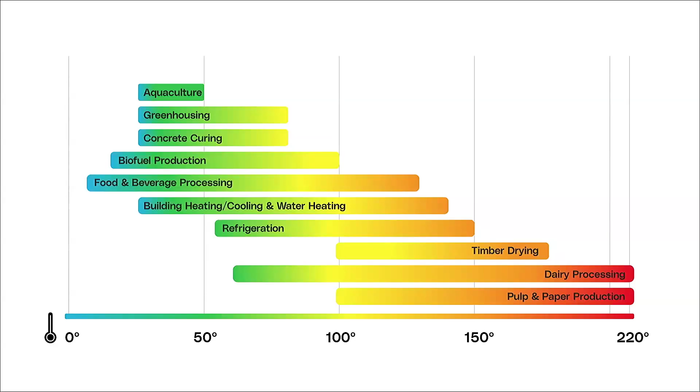In our homes, Hannah pointed out earlier, 32% of our electricity is used directly for heating. Approximately 30% for our hot water, and 10% of our electricity bill goes towards cooling, and that number is predicted to increase. That's a lot of electricity that is converted into heat. Now to go with my first point, to transition to a low carbon energy future, we cannot overlook the importance of decarbonising heat.

So what is geothermal heat, or geoheat? It's geothermal heat. And I've just got a little video so you don't have to listen to me that explains it. Geothermal heat is a renewable, low-emission energy source.

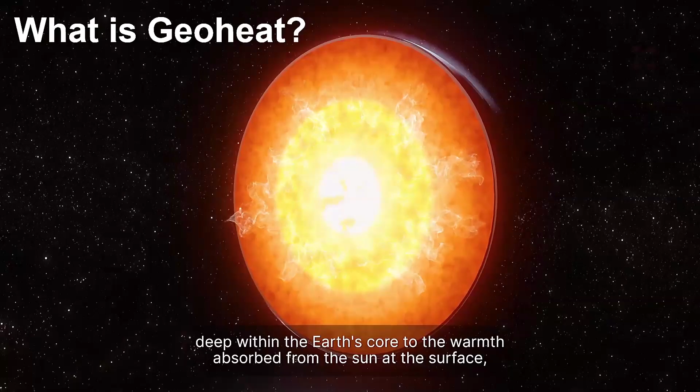Humans have used geothermal heat for thousands of years, and when this energy is used directly, we call it geoheat. It refers to all forms of heat present within the Earth, from the intense heat deep within the Earth's core to the warmth absorbed from the sun at the surface, as well as the high temperatures produced by volcanic activity. Aotearoa New Zealand's unique geology offers abundant and accessible geoheat, closer to the surface than in many parts of the world. From the Southern Alps to Northland, our land produces geoheat at varying temperatures.

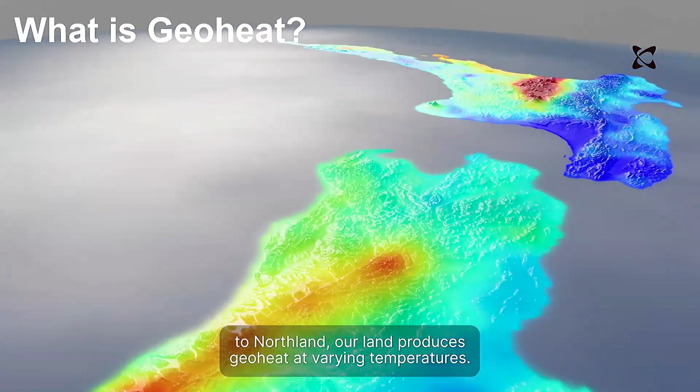What is on that map for you? This map here is the results of some work that my colleague has been doing over the last few years, and that's looking at how heat is transferred throughout our country. So it's looking at our thermal rock properties, our tectonic setting, our erosion rates, the physical properties of our rocks, and what that means for how heat is stored and transferred in our subsurface.

Caveat, it's got a color scale on it, so it does look like the Alpine Fault holds as much heat energy as Taupo Volcanic Zone. That is just a color scale thing. But that having said, we do have a lot of hot springs along the fault. The other thing to point out here, blue doesn't necessarily mean there's no heat, it just means there's less of it.

Geothermal heat is a... Don't need to listen to that again. I'll put that in there in case it didn't stop. So

Heat stored in the ground is generally stable throughout the year. As the video said, we've been using heat in New Zealand for a long time, generally around the high temperature stuff. But before we even settled here, in Europe, cavemen lived underground. They knew the ground was warm in the winter and cold in the summer. So this next slide sort of gives you an indication of how we access the heat.

In high temperature areas where there's a lot of energy in the subsurface, we utilize it for geothermal electricity generation. You wouldn't be able to do that with the heat provided down here. However, there is still heat in your ground that could be extracted for residential heating, office block space heating, greenhousing, and there's more and more technologies being developed that can convert low-grade heat into electricity.

So this figure here just sort of shows different ways, what we call direct heat, that's where you directly extract the heat that's beneath the ground, and indirect heat, where you utilize something like a ground source heat pump or a bit of technology that will convert your heat into electricity. There's a big conversion loss.

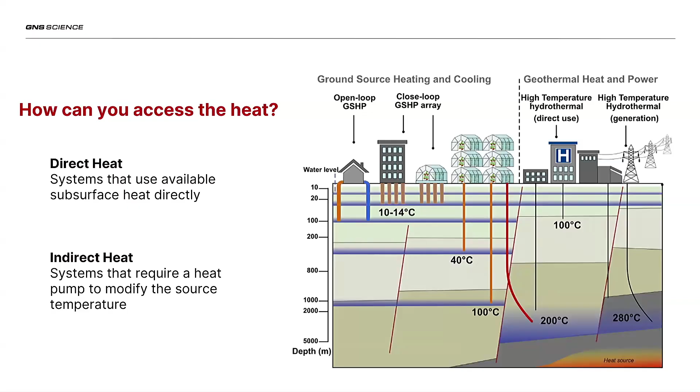Even when you're in the high temperature systems, when you're producing electricity from geothermal steam, you're losing about 85% of your heat, and your energy is just being dissipated or re-injected into the ground. So you've only got a 15% efficiency when you convert to electricity. And then when that gets to your house, you convert it back to heat. So how do you efficiently use it?

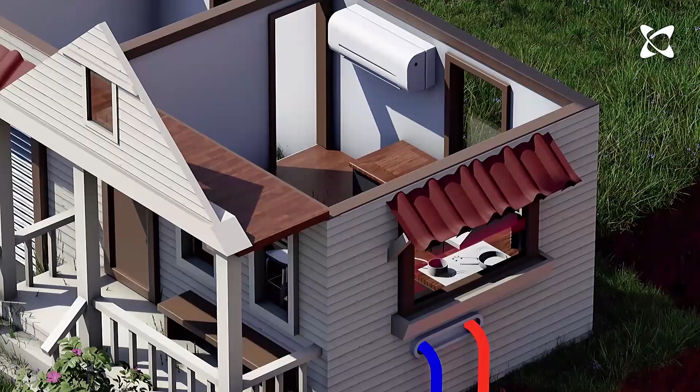This video will take you through a little bit about ground loops, how they get designed, and how they work. Cold flow goes from the house, pumped through your subsurface, picks up the heat, comes back into your building, converted through a heat pump, and out into your house for space heating. In a factory, generally you need high temperatures for more energy to run your industrial processes.

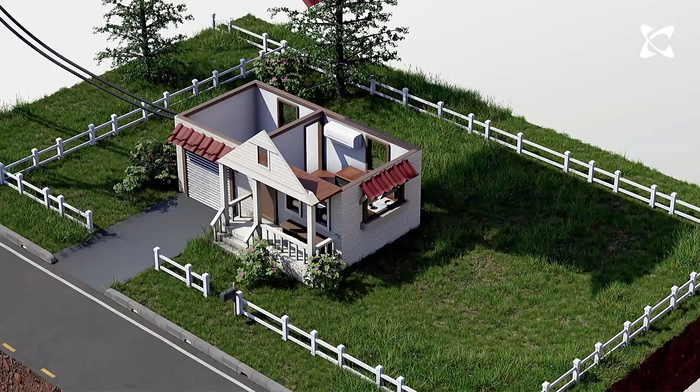I guess the main benefit that I didn't mention here is that for space heating of your houses, you still need electricity to run your heat pump. But the coefficient of performance of your heat pumps these days is up to about four. So for every 1 unit of electricity put in, you get 4 to 5 times more energy out using your subsurface temperatures.

So they use that waste heat again to warm the glass house, and then the whole circular economy. Then the waste of the rotting fruit and stuff that they don't sell goes into a worm farm, and that soil gets regenerated and goes back in. And so it's a nice little ecosystem they've got there.

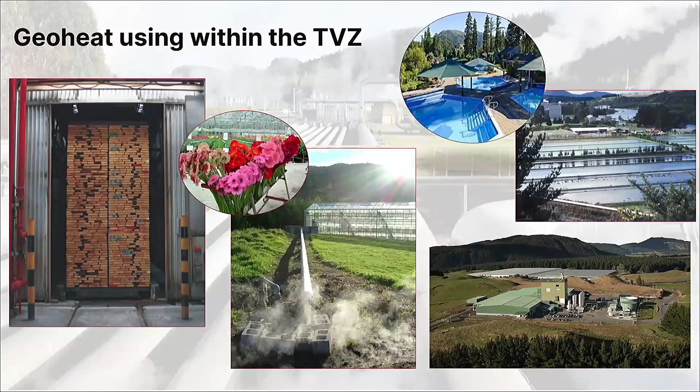And the one with the long pools there is the Taupo Prawn Park. Have you ever been up Taupo way, where they grow tropical prawns up in central New Zealand, North Island?

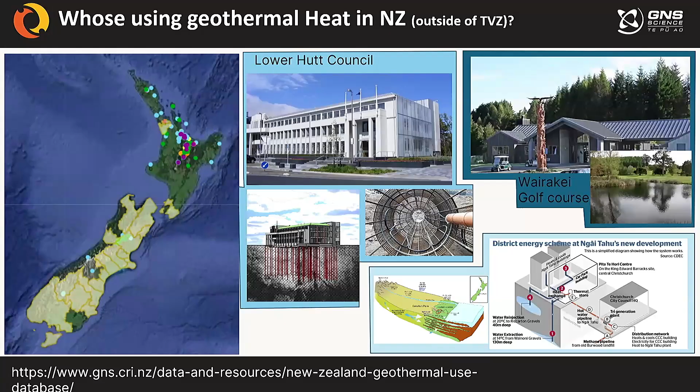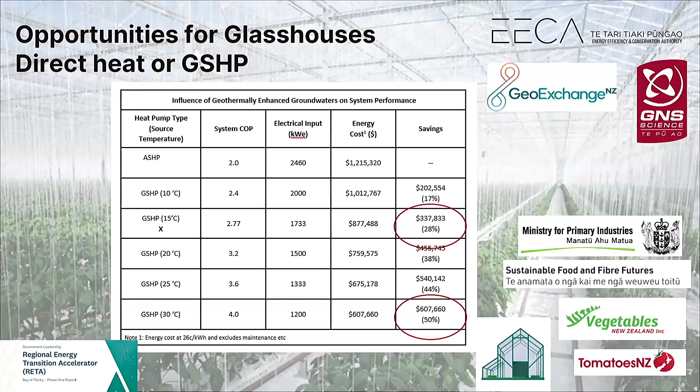The other reason for putting this slide up and why we've got all those logos there is we've just partnered with Vegetables New Zealand and got Sustainable Food and Fibre Futures, SFFF, funding to have a closer look at the geothermal resources around to help convert our glass houses, which are predominantly LPG heated or coal heated. And so we've got a little project working with them over the next 2 years.

If we're converting the way we're heating our housing, we look at electricity. She did some nice graphs about how much you save from that. We put ground source heat pump in on a district system. The installation costs drop dramatically. Your efficiency for your house increases dramatically. Your energy poverty and your energy equality should levelize with support of funding.

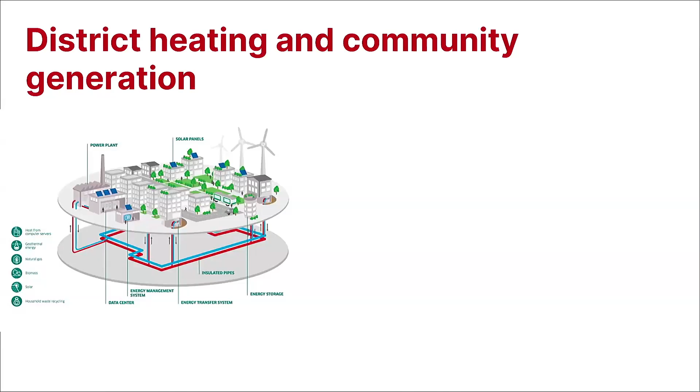So this is my utopia. That's what I want you guys to figure out. Can we do this here? They do it in Europe. That's really all I can say, is they use ground temperatures there that are around the same 15 to 20 degrees for heat exchanging, heating an office building who needs heat during the day, dumps their cold into the ground, and they swap it around, and that cools an ice skating rink or some other buildings on the same loop.

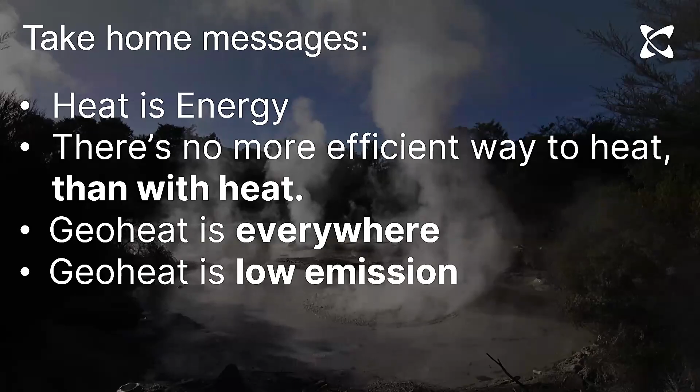So, take-home message: heat is energy. There's no more efficient way to heat than with heat. Geoheat is everywhere. Geoheat is low emission, and geoheat is available to you.

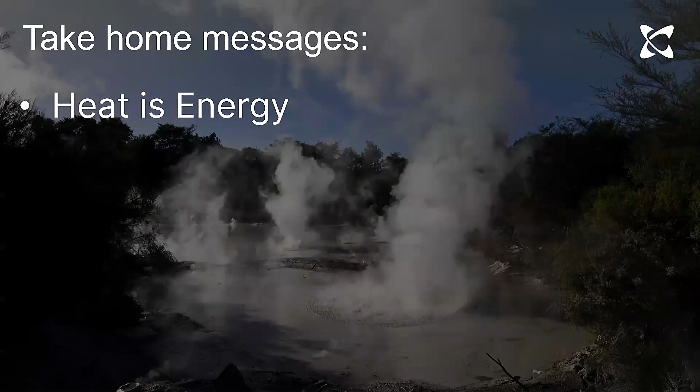Going back to the district heating slide, what's the smallest residential district that would be economic to do in New Zealand? Do you know? Like, is it 50, 100 houses that it might be economic, or? So we have a colleague who'd be able to answer this probably a lot more eloquently than I will. It all depends on your building usage, your building's demand, and the geology you're in.

We have ground source heat pump systems already installed in New Zealand on a residential, or there's one up in the Alps somewhere. That's a lodge, a cabin, and their payback for their upfront investment to savings, I guess, was 7 years. So when you're looking at the grand scheme of a single house, New Zealanders own their house on average 7 years, but I guess with more we invest into our houses these days for double glazing and insulation and all of that stuff, for those of us who are retrofitting everything, we stay in them longer.

So if you build on more houses, the scale of, what's the word? Economies of scale, the payback is really decreased, right? And if you're going for these new builds or in districts that are going in, you're already putting roads in, you're already putting your subsurface electricity, you're already putting the subsurface gas lines. Not much more to put a subsurface water pipe.

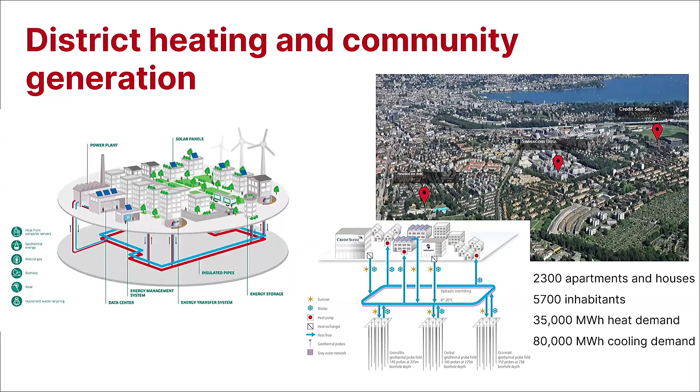Right. Well, thank you. That's super interesting. Lots of food for thought and clearly a huge potential if you get the right people on board and the right settings, I guess. That's why I'm here instead of at the Geothermal Workshop, which is in Auckland right now. But yeah, it's really important to get these messages out. This needs to be heard by people when they're thinking about how they're decarbonising our future.